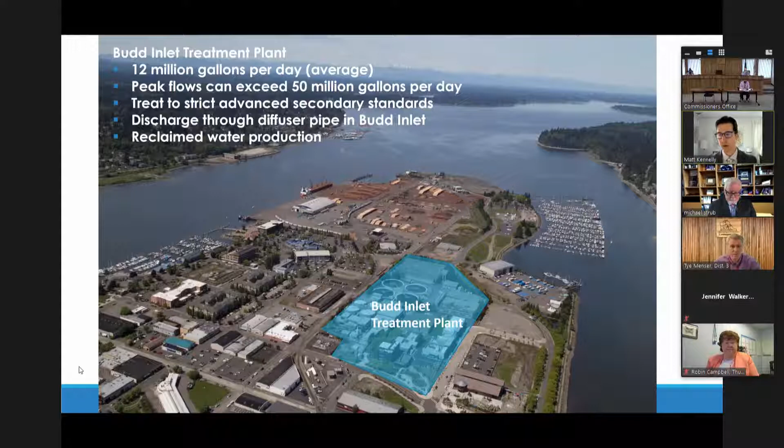So our treatment process is fairly complex, but we like to show this graphic because it breaks down. We have these physical processes and our biological processes, whereas our physical steps up front remove rags and grit and other things that come down in the treatment process, such that we can treat the nitrogen and oxygen demand components in our biological process. So there's a series of very complex steps. But what we're doing is we're really using nature to break down those components that we don't want to send out into Budd Inlet or reuse in our community.

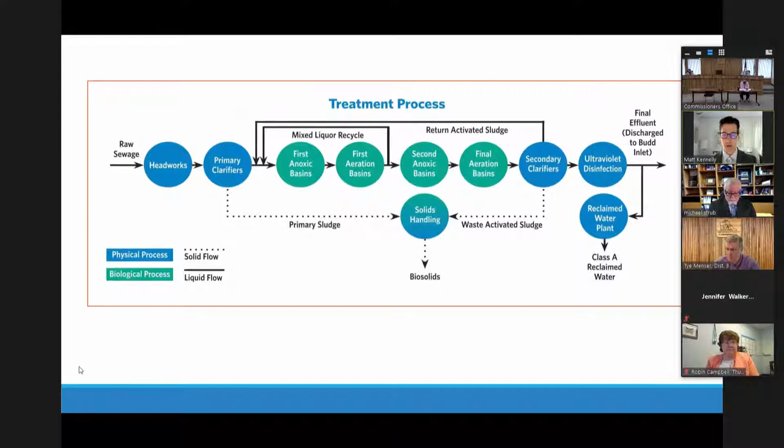So what I'd like to show you next is a video that we recently developed. We're very excited to roll these out. This particular video shows how we clean wastewater in just 5 key steps. There's a series of videos that our outreach and education folks put together. So this kind of highlights some of the things you might see in those videos. So I will share a different screen here in order to show you that video.

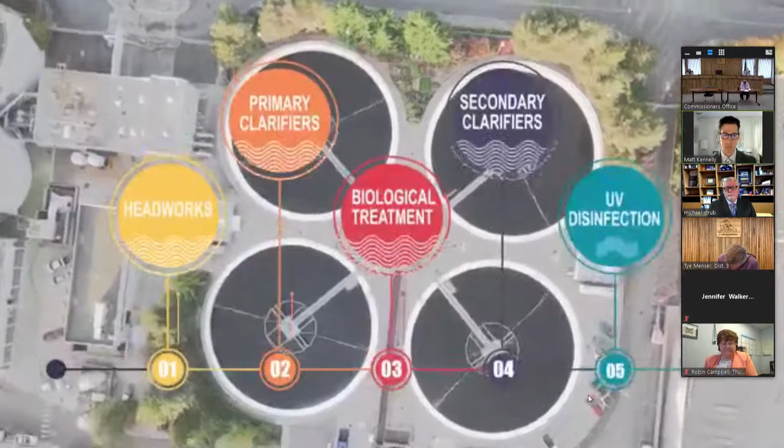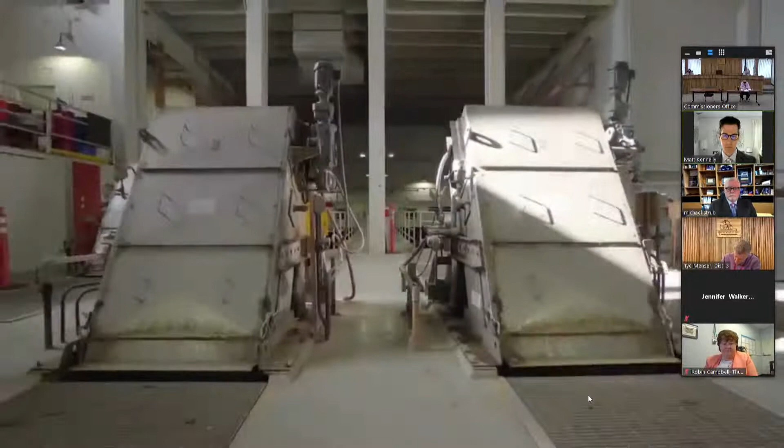Just how do we clean the water that comes to the Budd Inlet treatment plant in Olympia? Well, here's the process in a nutshell. First, the dirty water arrives via a large underground 5-foot diameter influent pipe. Step 1, our headworks, where we take out the trash. Headworks, that is where we remove all the garbage from the wastewater. The incoming water runs like a river through big screens that filter out the trash, which then gets sent to the landfill. After we screen out the trash, the water flows through the grit chamber, where we get the smaller, heavier items out, aka the grit. Things like coffee grounds, eggshell bits, and dirt sink to the bottom of the chamber.

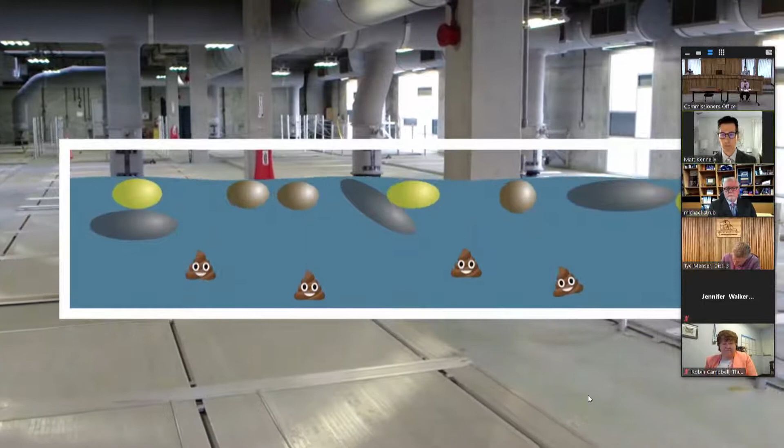Under the floor in this giant room is step 2 of the treatment process, known as the primary clarifiers. In the primary clarifiers, the water slows down and more waste settles out. The lighter stuff, the stuff that floats, are the fats, oil, and grease, called FOG for short. The heavy material, yes, that's the poop, though we call it sludge at this point, will sink to the bottom. Long panels skim the bottom and top of the basins to remove the sludge and FOG.

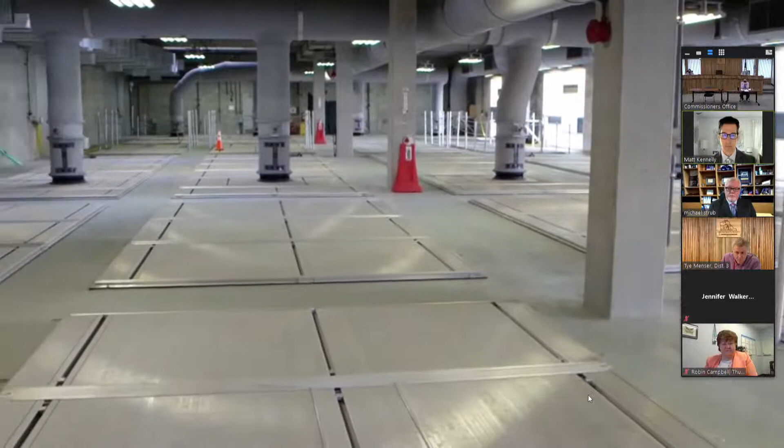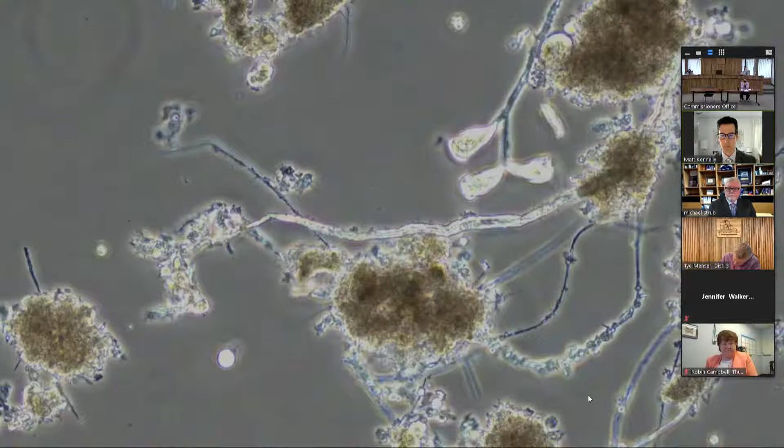Time for step 3. The next step in LOTT's wastewater treatment is the biological process. In this step, we use 60,000 to 70,000 pounds of microbes that work at the plant around the clock to help clean the water. In these basins, we mimic nature by using bacteria to break down the waste and gobble up the nutrients. It is especially critical that we remove the nutrients from the water, especially nitrogen, which comes from human waste, food, and some soaps and detergents. If excess nutrients are released into Puget Sound, it can cause algae blooms. Then, when the algae die and decompose, the oxygen becomes depleted in the water, which can cause other aquatic plants and animals to die. That's why this biological treatment step is so important.

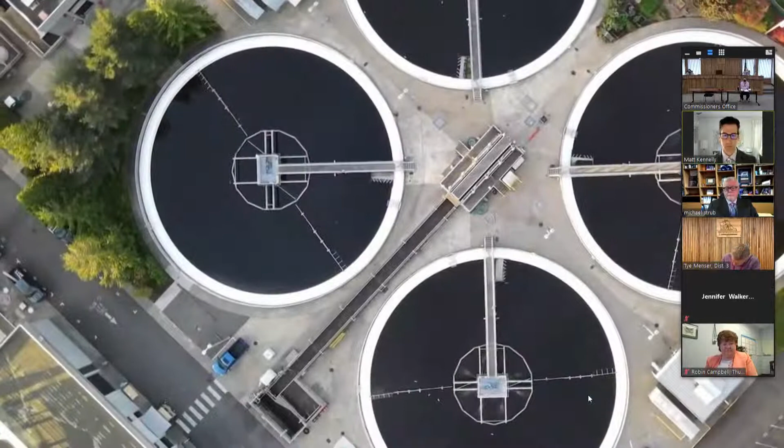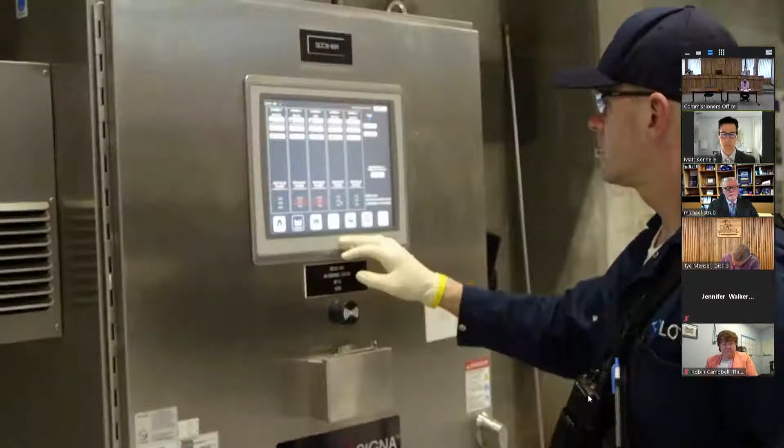Step 4, the secondary clarifiers. In these secondary clarifiers, we let the water be still again. Here, the bacteria clump together and sink, helping pull other suspended particles out of the water. These bacteria are collected, and some are sent back to the treatment process to be reused. Step 5. LOTT uses ultraviolet UV light for disinfection. The ultraviolet light deactivates any bacteria or pathogens left in the water.

Here you have it, the treated wastewater called final effluent that is ready to be released into Puget Sound. What you sent us when you flushed the toilet or drained the sink arrived here looking like this, and now leaves like this. This water has been treated to advanced secondary standards, the highest level of treatment currently provided at any wastewater treatment plant along Puget Sound. That's the process that protects our waters that takes place 24 hours a day, 365 days a year at the LOTT Budd Inlet Treatment Plant.

That's a little bit about how we do that. It's sometimes kind of funny if folks want to see those types of videos, if it's 8 a.m. and you're eating breakfast or drinking a cup of coffee or something, but it's something we take very seriously, how

we do that treatment. So there are more videos that we have if you go to our website, and they're linked here. So in the presentation we provided, you can click on these links and they should work. But again, we're proud of these videos, and they provide a good overview if you needed to share those with any of your constituents.

So we also get resources from the wastewater. It's biosolids, electricity and heat, and reclaimed water. The biosolids are what's removed up front in some of those physical processes, but also a lot of that bacteria that we use to break down the nitrogen. We have to waste some of that, and that goes into our digestion process, which is stabilized there and creates a beneficial product that's used as a fertilizer in Eastern Washington. And we're part of a King County driven program to apply biosolids in Eastern Washington there in Douglas County.

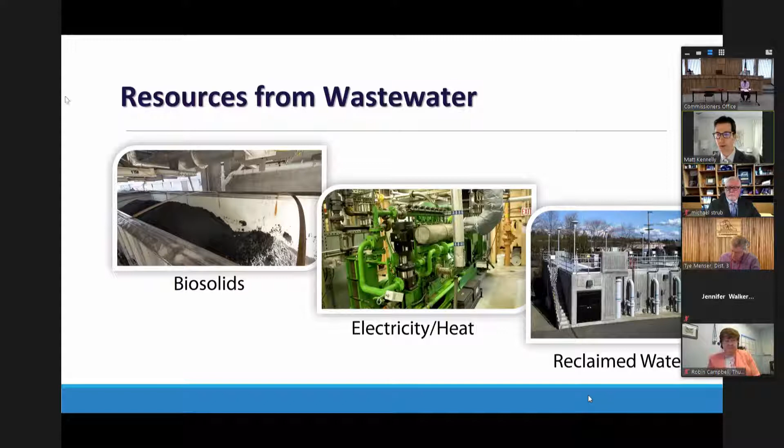And reclaimed water, as I mentioned before, about 1.5 million gallons per day of reclaimed water produced at our Budd Inlet plant. We also have reclaimed water at our Martin Way treatment facility, about 2 million gallons per day capacity in Lacey. And so that Class A reclaimed water is a drop for drop offset from potable water. So it's treated to a very high standard. It's approved to use for anything other than drinking.

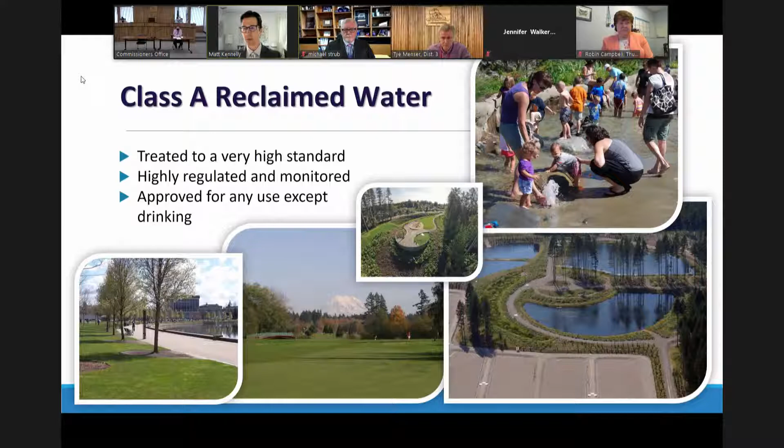And so how that's used in front of the Children's Museum is an outreach project and public community amenity in our stream. We have irrigation at the Tumwater Golf Course pictured here in the center and the bottom. There's about 600,000 gallons per day in the summer. And the tank featured in the center here is what stores that. It's a 1 million gallon tank built into the hillside that provides that water for the golf course. There's also a park that the city of Tumwater put on top of that, and we collaborated with them.

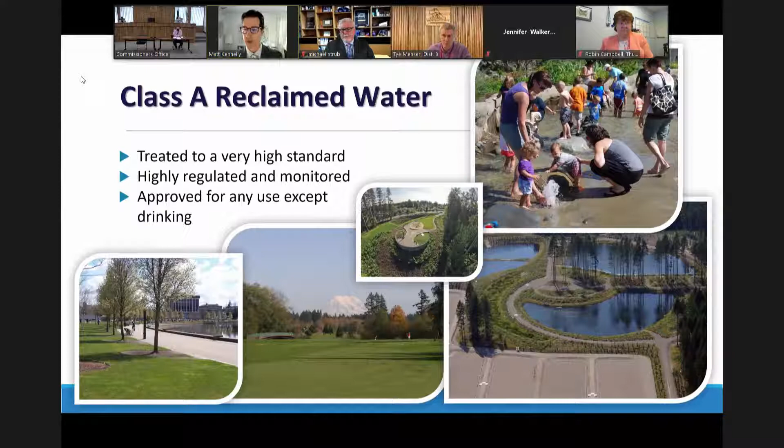Capitol Campus Grounds is part of that reclaimed water system, as well as out in Hawks Prairie, we have an infiltration system that goes through some wetland ponds prior to discharge into infiltration, and that offsets groundwater. And all that was driven from what we call our highly managed plan. It's called the Wastewater Resource Management Plan formally. And that was developed in the late 90s.

And the concept there is really invest in wastewater treatment as a valuable resource and look for those community benefits to show that. And so we're continuously planning for how we're going to expand our reclaimed water capacity as our community grows. The limits on the discharges into the sound are capped, and so as we grow as a community, we're going to be expanding more into our reclaimed water systems.

So part of that planning is an update right now of our master plan, and we completed phase 1 in draft form in our Budd Inlet treatment plant on how we're going to look to expand there, and we're looking to invest more in our central treatment plant for efficiency, but also look out into our system on how we manage capacity. So once that reclaimed water is produced, how is that going to offset groundwater supplies? Where are good infiltration areas? How can that be beneficially reused? And so that's what's ongoing now prior to phase 3, which would be outreach and education on it.

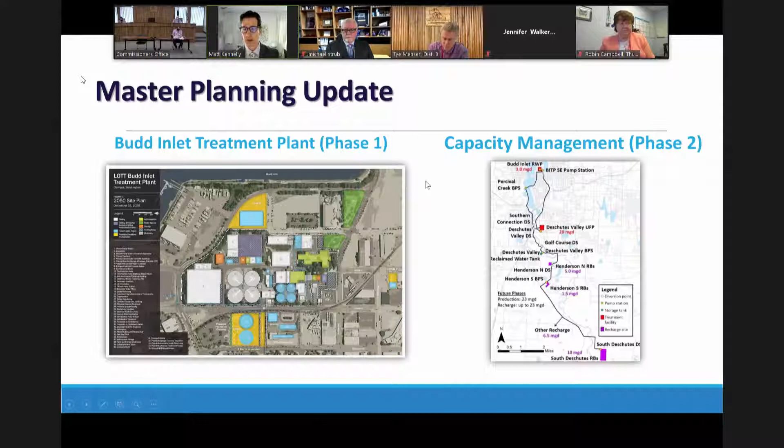The other thing we do out of the wastewater resource management plan is annual reports that we submit to Ecology. And LOTT's a little bit different than some other municipalities that do some of this type of planning, where they might do a 6-year plan, build a plant, grow into it. We do continuous planning efforts, and those have paid off because technology changes, growth rates and sewering rates change.

And so we look at our flow and loads, we look at how much inflow and infiltration is coming into our pipes, we look at the capacity we have, and we put that together with our asset management program from our maintenance group, and then that goes into our capital plan and our biennial budget.

And so the average customer that would get a bill for sewer that's connected to any of the city's sewer would see a LOTT charge and a city sewer charge. And that's after they've already connected up to the system. And our monthly service fee is called our wastewater service charge, or WSC. It's about $42 per month.

And that's the cost of maintaining all those systems that you saw in the video. That's only part of them, but the treatment plants, the pump stations, pipelines, all those systems that go into maintaining all that infrastructure to take a product that's not usable and will harm our environment and turn it into a safe product. And then there's a connection fee that each jurisdiction also has, but that connection fee allows us to invest in infrastructure to accommodate that growth.

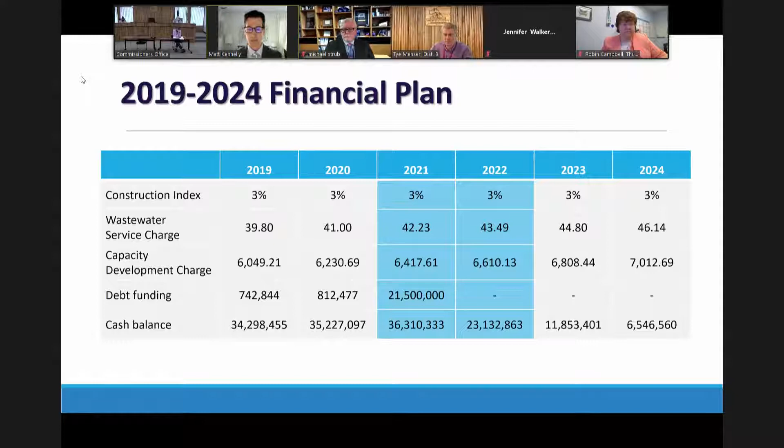So as I mentioned before, our capital and debt service is about 3/4 of our budget, and operating here is about 1/4. And these are the latest numbers shown here from our biennial budget. Some of our upcoming projects in that capital plan are our biological process improvements, our digester refurbishment, our collection system, and our Martin Way efforts.

And our biological process improvements, to highlight that, that's about a $29 million construction effort. It's taking about 30 months of construction and years of planning and design. And we're excited to get this done because it will improve the energy efficiency of our plant by over 20% plant-wide. And that's significant when you think about us spending over $1 million a year on power just to pump and aerate wastewater for treatment.

But also upgrade systems for new technology that are approaching 30 years old. That'll put us in good shape into the future as regulations continue to change. And then our digester refurbishment, our digesters were built in 1982. Those are what stabilize those biosolids that go to Eastern Washington and produce that gas. We want to make sure that those systems and that gas are contained and allow us to beneficially reuse those products.

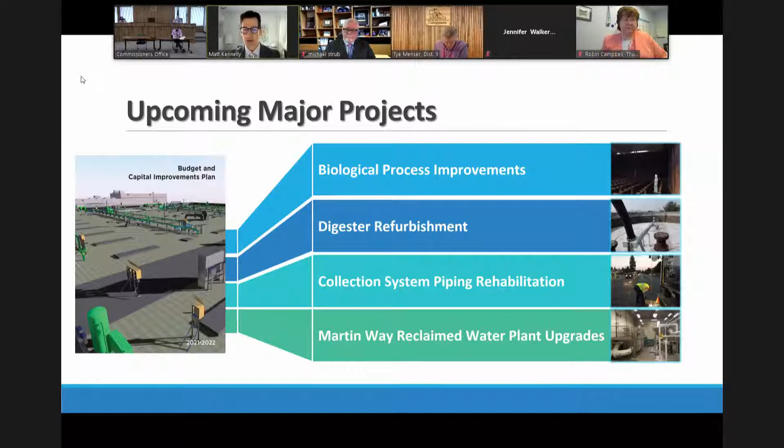Our collection system, we don't have a large one like the cities, but we do have significant large pipelines that needed to be televised and inspected. And in general, they're in pretty good shape, but we do have some efforts that we need to do in order to maintain that. And out at our Martin Way reclaimed water plant, there are some targeted upgrades to make sure we have redundancy at that plant. And so one of the challenges we're looking towards in the future is sea level rise, and we're working with the Port and City of Olympia on that effort.

We're doing a reclaimed water infiltration study that's been ongoing for several years, and that looks at the pharmaceutical personal care products, we're calling those residual chemicals, that a lot of them are made to not break down in systems. So as an example, sucralose or artificial sweetener doesn't break down in your body to a great extent. Well, it passes through, it goes in the treatment plant. There's a certain amount of removal, but the treatment plants weren't built for that. And so what removal happens, what's the fate and transport of these chemicals? Are they harmful? So there's a large group of scientists that's helping us with this effort, and more to come rolling out later this year.

Regulatorily, the Budd Inlet itself will have a total maximum daily load, and that's a cap on nitrogen. That's coming, and we're preparing for that. We're part of the Capitol Lake work group for the EIS. We're tracking that closely. And then there's recently a draft permit that came out from Ecology for Puget Sound, and that will require many of the other treatment plants on Puget Sound to do nutrient removal. We've been doing nutrient removal since the early 90s. So the benefits to LOTT for other plants doing nutrient removal is actually some of those nutrients that come down our way will be lessened. But certainly there's some changes that we'll need to make under that general permit.

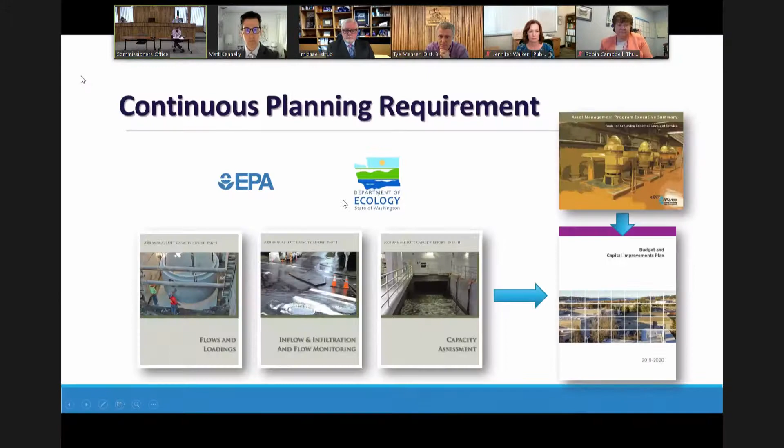Thanks. On page 3, you talk about some numbers and some percentages on those bullets. Could you give me a little better breakdown of that explanation on the total population? I'm trying to figure that out. We've got sewered population, total population, and septic system population. I'm just trying to figure out how that boils down into toilets, I guess, or hookups, or something. Sure.

It's a lot of factored math, quite frankly, because everything in our world is broken down into what we call equivalent residential units, or ERUs, and that's an amount of volume. Then you have to look at the demographic issues, which are how many people per household, per family, whatever the average is. That changes regularly. But our most current numbers, and most of this comes from Thurston Regional Planning, TRPC, factored in that total population that is serviced in those three areas that you see on the map

is about 175,000. Sewered population is, again, a factored piece of math that says of that, about 116,000 people are on the system. In terms of how many accounts that is, or equivalent residential units, it's about 60,000 accounts. So it breaks down that way. If you do the math, there's roughly two point something people for an equivalent residential unit.

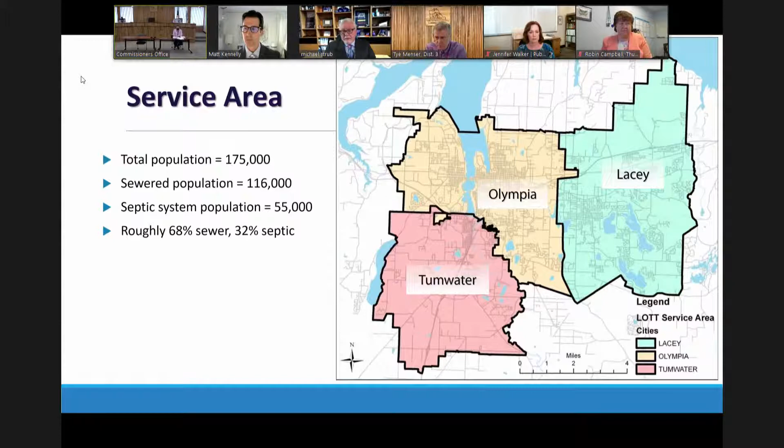You would imagine that over the years, as areas have developed and they get stretched further and further away from the main sewer lines, in many cases it was financially impractical to hook them to the system. But over time, we hope to bring those all onto the system, and collectively, the jurisdictions and LOTT are addressing those system by system.

So, Mike, that could be like the UGA of the municipalities and future hookups, you might say. Yes. Okay. Well, these are existing hookups. But in the future, we're hooked up to that 55,000. Well, you're not hooked up. No, they're going to be hooked up. Okay. The 55,000 are just counted within our service area as individual systems. They're not on our system. We don't collect rates from them, but they are in existence. Okay. But there are some of them that are inside the city limits.

And those are the ones we're trying to address right now. And then there will be some that are brought in. A good example of that, Commissioner, is right now Lacey is undertaking a large project to convert around 400 septic tanks in the Capitol Golf Course area. I forgot what they call that. Matt, do you remember the name of that? I don't, but that's the area. It's a neighborhood, and they're all on septic systems and around the Capitol Golf Course.

And they've all agreed to, and I'm not sure they're part of the city, but they've all agreed to come into the city now. And we are, I should say again, Lacey is primarily converting all those systems. LOTT participates in that by rebating half of the connection fee, so as an incentive for them to change over.